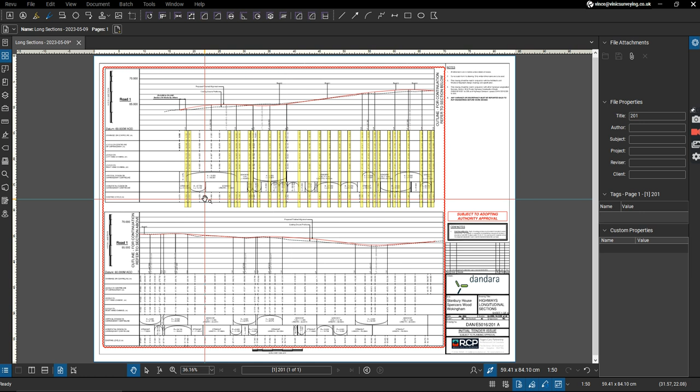This is just another quick example of how you can use Bluebeam Revu in a very small way, along with a spreadsheet, to work out cut and fill for a road fairly quickly if you haven't got something like Civil 3D to actually work out the cut and all the materials from plans with all the level details on. So I've got the long sections here - this is just one of them.

What I've done is started by marking it up in Revu. You can see here all I've used is a text box to highlight the levels that I want. So I've literally just created a text box, and I've left a couple here. So all I'm going to do is copy this and drag it across and highlight these last few.

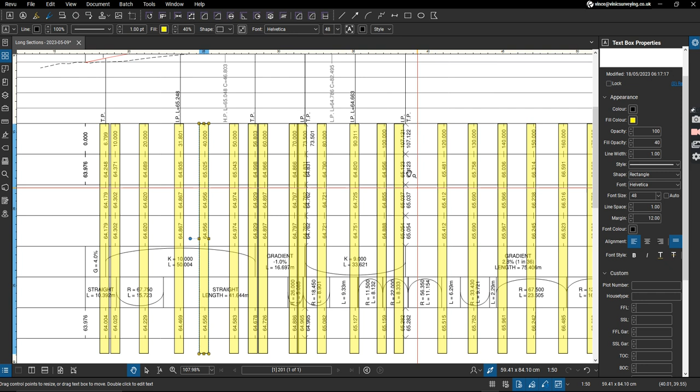This just makes it easier to see when you're working with all of this, because you might not want all of them - some of these are close together, some might have a lot of details missing, etc. But this makes it easy when you're running through. So those are marked up, and then what I do is rotate the view. There you go, that's easier to read.

I've then got a spreadsheet. What we're going to do with this is we've got a long section page here. Jump over here, we've got makeups for our road, including thicknesses, and what happens if the road formation isn't deep enough after the topsoil strip's been done, so if you have to make up levels, etc. So I've got one here for a tarmac road, one for block paving road, and this is for the footpaths.

I've also got this little number down here where it says base course increases from - this is where the fill goes out under the curb line of your road, so you want that to be wider. Over this side I've got topsoil strips, so it's 200 mil, extra widths under the curbs. Let's say we want to go 500 mil wider each side, standard width for the road, standard road type.

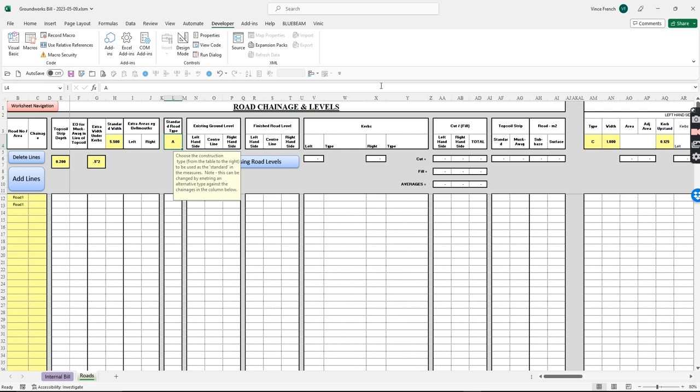What I'm going to do is bring back up the Revu and drag that over there. Oh, that should have split the page - it hasn't for some reason. There you go, and on that one.

So on this page we can start. I'll just drag that over - there we go, that'll do for now. Jump to this page. We just enter in the chainages. We won't do all of them - that will do for now.

We enter in the existing levels. This is quite a quick process because where you've highlighted it up, it's easy to follow.

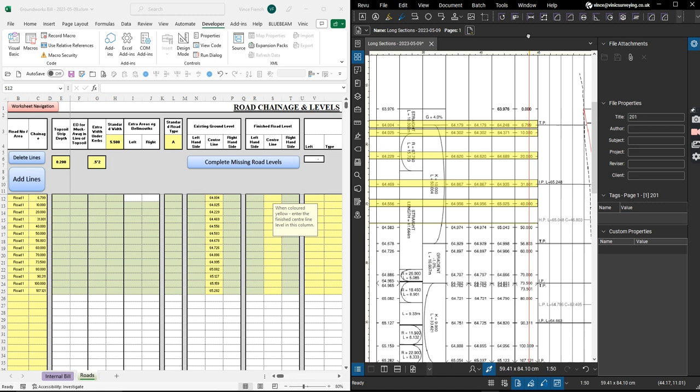Then we can enter in the long sections. Now just up here we can see we go center, left and right, so let's do those - entering in the level values one at a time as we go along.

I'm not using my normal computer keypad here, so that's why I'm going a bit slowly. Now, I've left the formatting in from an old example here, so let's just put the formatting back to where it should be.

Right, so you can see there, put the chainages in, and what this will do is look at the existing levels after topsoil strip. It will look at then the road construction depth, it will look at the finished road levels, and it will work out your cut and fill for you. So in each of these little chainages, it will also work out the subbase area based on the standard width.

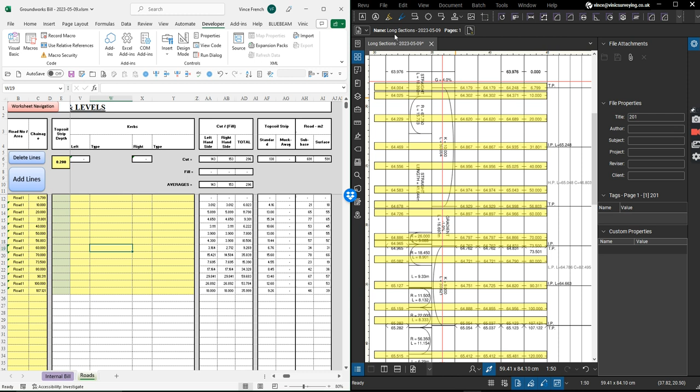So that's us really finished with Revu. Let me jump back into this. There are other things you can also do.

Say if this last section of road was block paved and not tarmac as we've done as a standard road type, if we put in road type B, that changes things. I don't know if you could see that, but over here, if I type in road type B, it changes the cut because road type B has got a different overall thickness to road type A.

So that's all our details completed. And if I jump back into my bill, it's saying I've got some updated quantities. Do I want to have a look? Type yes.

Just bringing across some details. This is slower on here because I'm recording the screen, but hopefully it won't be too long. There we go, so I've got all my details in there. These are just some made up rates at the moment, so it's worked everything out for me.

If I was to go in, here we've got compact formation, 691 square meters. If I was to go and put in another parking bay on that side, come back to the bill, got 721 square meters now.

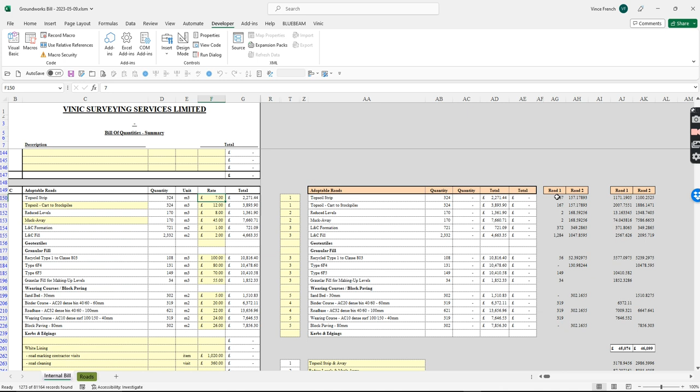Right, here we go, so okay, the formatting needs a bit of sorting out. Let's just go back to home. Let's do that to 2 decimal places, and this is obviously money, so let's do that.

Right, here we go. So what it's done is it's split all of these quantities down between roads 1 and 2, and then applied the rate and given us a value for each section in road 1 and 2. What I've then done is group these, so topsoil strip, reduce levels, so it gives me values for everything that's worked out, just to show that it works.

We've got a total of 92,173.03, and that comes to 92,173.03 there. So that is all of my cut and fill for the roads worked out, and there are some other facilities in here.

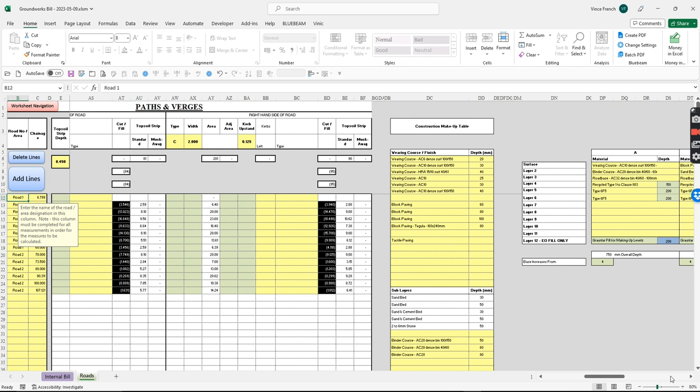I suppose you can do things like say into certain areas my topsoil depth has changed from the standard. So if I said it was 250 here, 300 here, and 300 here, you can see it changes some of these details here. And you could actually also say that the topsoil is bad quality, so you want the topsoil to be muck away. So this topsoil strip here is actually classified as muck away now.

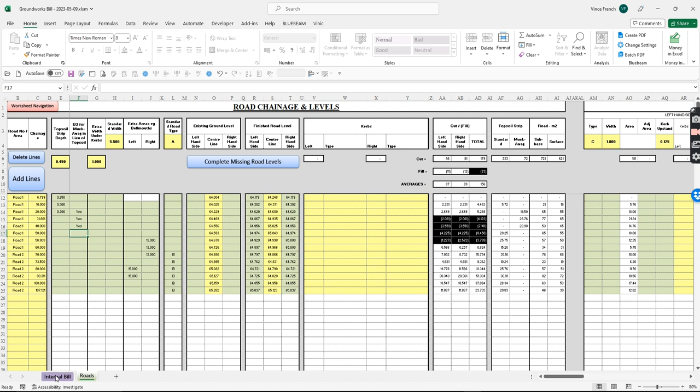And when you jump back here, update again, your descriptions will change because you've got new descriptions to add into the bill. So just wait for this finally.

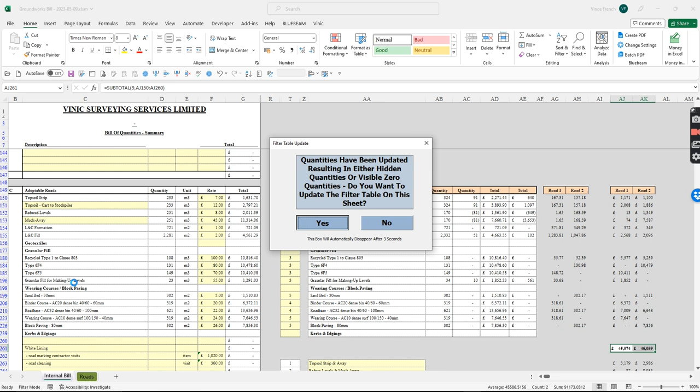Now this is just a small example, but when you've got a lot of roads, this really can make a lot of difference to your cut and fill. Instead of just putting some average levels in, this works it out. As I said, between all the changes, now these quantities in here have all changed to suit the new topsoil strip and muck away quantities.

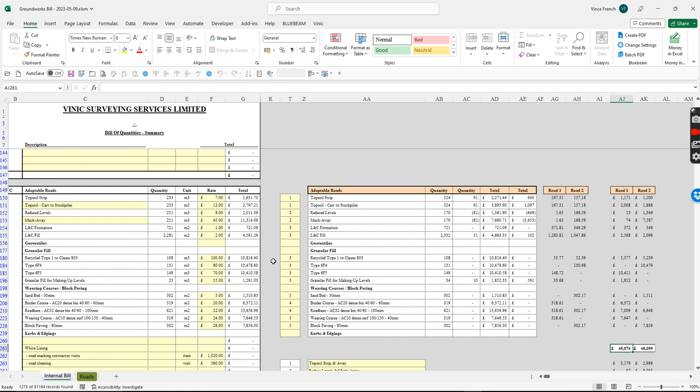So you can see here we've got 233 cube, but on my original allocation it's 324 cube. If we double click on here again, that will split it all down again. So yes, that's the example for using long sections for working out cut and fill for roads and all the other materials that go with it. I hope you like that.